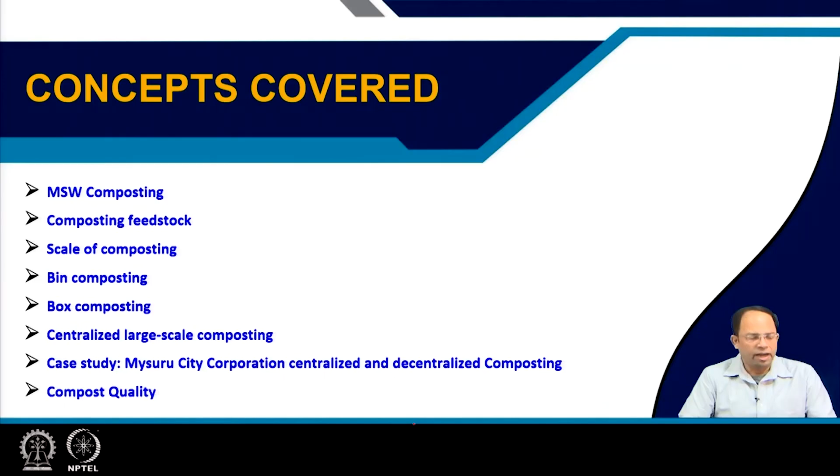Welcome back. In lecture 29, we will continue with composting. This is composting part 2. The different concepts that we will cover are municipal solid waste composting, composition of the feedstock or the incoming organic matter that comes for composting, scale of composting, bin composting, box composting, and centralized large scale composting. We will do a case study of Mysuru City Corporation, which uses both centralized as well as decentralized composting, and finally we will talk about compost quality.

Municipal solid waste composting started in India during the 1970s, and initially a lot of mechanical compost plants came up. We have earlier talked about mechanization, right, mechanical and manual operations. In mechanical compost plants, in the initial days this was set up. This had a lot of mechanical processes, and because there were a lot of machines and all, there were a lot of maintenance issues. Most of the equipment was also imported, so this had a lot of maintenance issues.

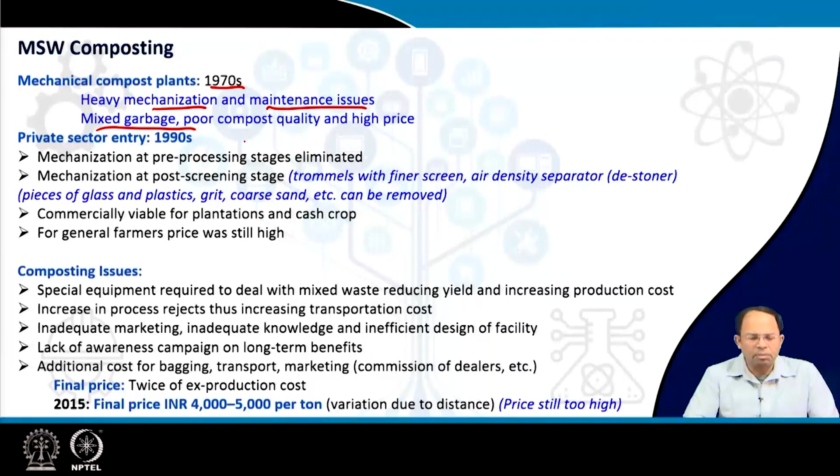Because the garbage was mixed garbage, there was no segregation at the beginning. That's why this kind of plants were introduced, but our garbage was so mixed, or the quality of the garbage was such, that the final resulting compost quality was pretty poor. And because of high mechanization, the prices were also very high for this kind of plants, and that actually resulted in failure of this kind of plants.

So the next generation of compost plants started coming during the 1990s, and usually the private sector started working on this particular sector. That means there were a lot of operations set up by private entities. Here the mechanization was removed at the pre-processing stages. That means initial sorting was done manually to a certain extent, but already the waste was segregated, though still some amount of manual sorting was required because not everybody segregates perfectly. Sometimes some areas of the city don't segregate and they give mixed sort of waste, right? So some amount of sorting is required.

But the mechanization of that particular process was eliminated, and mechanization was only adopted in the post-screening stage. That means once compost is produced and cured, mechanization was introduced so we can clean the final compost, using trommels with finer screens. In the pre-processing, trommels of larger screens are used, but in the post-processing, trommels of finer screens, or air density separators, which remove the stones, pieces of glass, plastic, grit, coarse sand, etc. can be removed from the final compost.

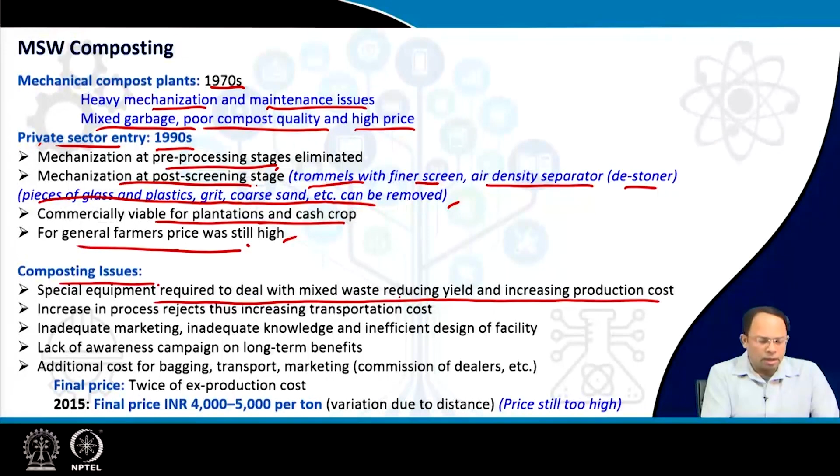Increase in process rejects thus increases transportation costs. If you deal with composting with mixed garbage, a lot of rejects will result, and that will increase transportation cost. This reject has to be transported to the landfill, so it is double transportation cost - you have to transport compost to the compost plant, then again transport it to the landfill site. Other issues include inadequate marketing, inadequate knowledge, and inefficient design of facility. That means each facility of composting has to be designed as per the character of the waste, as per the final product characteristics, and so on.

If you lack adequate knowledge in plant design, it will result in a wrong design. Similarly, inadequate marketing means I have to know where I can sell my product or what quality of product. So these are the things which are important. Lack of awareness campaign on long-term benefits is also an issue.

Repeated utilization of chemical fertilizers reduces the overall fertility or condition of the soil. So what are the benefits of composting? Composting improves the condition of the soil, and repeated application doesn't create problems. So this kind of awareness needs to be built up, and for that, campaigns need to be done.

Then there's additional cost for bagging, transport, and marketing of compost, because we have to give commission to the dealers and so on. Usually the final price is twice the production cost, and in 2015 the rate was around 4,000 to 5,000 rupees per ton.

Even though some ULBs do subsidize and sell it at much lower cost, if I really want to sell compost through a pan-India distribution network, for a large commercial composting plant this would probably be the price we have to sell it at. That's why the price is still quite high, and there's also variation due to distance—this 1,000 rupee variation is just for different distances to the final end consumer.

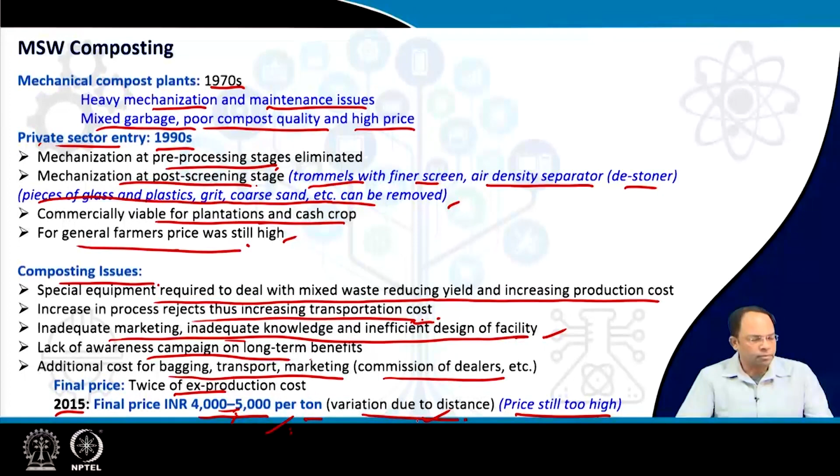Coming to composting feedstock, if it's segregated waste feedstock—that is mostly municipal wet waste or biodegradable waste, vegetable market waste, yard waste—then there is no problem. But if it is mixed waste feedstock, where the waste is mixed, then mandatory pre-sorting and segregation of the organic fraction has to be done for composting.

Street sweeping waste and drain cleaning waste are major sources of contaminants, and this has to be avoided. This is something we have to be careful about. If this gets mixed in, then the entire compost batch will also get contaminated, and we cannot use that as fertilizer.

Now coming to composting plant overall design, the first area is divided into multiple zones. The first area is the tipping area, which is usually a side-open large shed.

This is the area which receives the daily waste, and we have to plan it because composting takes a certain amount of time, so we have to store waste for a certain amount of time. All the everyday waste comes from the urban area, so we have to have storage capacity for holding waste for that much amount of time. The quantity has to be really thought of accordingly.

The area has to be planned, and unregulated storage is not allowed. That means we cannot store inconsistently—someday more, someday less, someday not at all. That kind of operation cannot happen. Everything needs to be planned earlier.

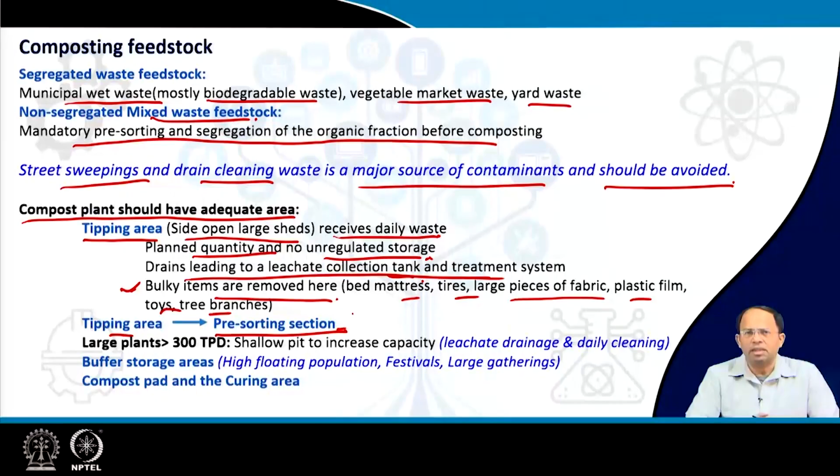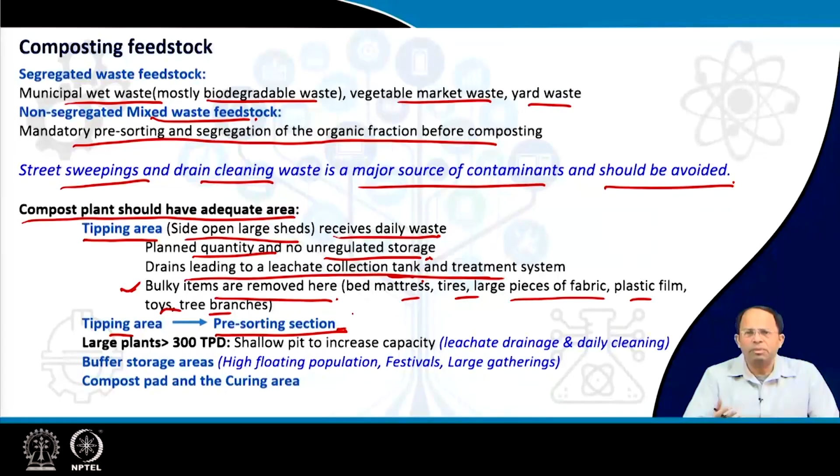This pre-sorting section is where we remove certain amounts of mixed, larger size material. Usually manual sorting is done—we remove some plastic, some plastic bags, or some amount of paper. We remove smaller things like that as well.

In case the tipping area does not serve as the pre-sorting area, the waste moves to the pre-sorting section. Sometimes, in case of large plants—for example, more than 300 tons per day—we can increase the size of this holding area by creating a shallow pit.

That means that because we create some extra volume below ground, there will be a lot of leachate that comes out. So leachate drainage and daily cleaning of that particular area is needed before we remove that waste to the next area. All this needs to be calculated.

And buffer, usually we have some buffer storage areas as well, for areas where there are a lot of events, festivals, floating population, and large gatherings. So we need to have some amount of buffer storage area as well in the plant.

Finally, from the pre-sorting section, the compost goes into the compost pad, where we create these piles of garbage which get composted. After the basic composting process is over, we leave the compost for curing, which also requires some area, usually 1/4 of the area required for the compost pad. So we have the compost pad and the curing area as well. These are the areas required for setting up a composting operation or composting plant.

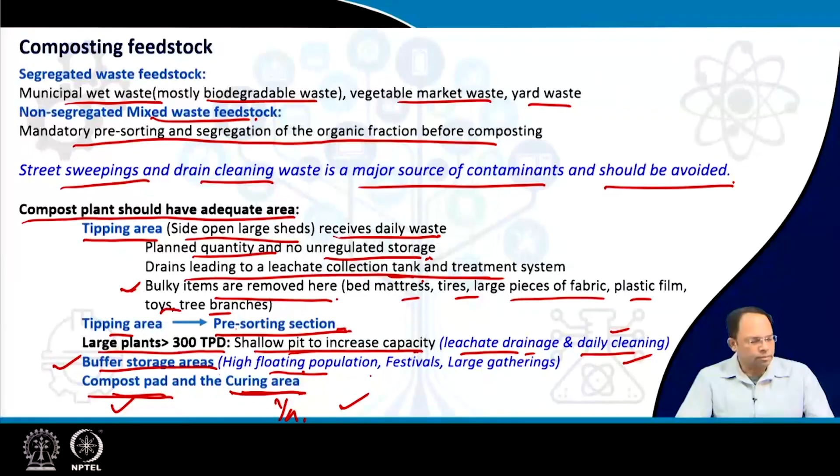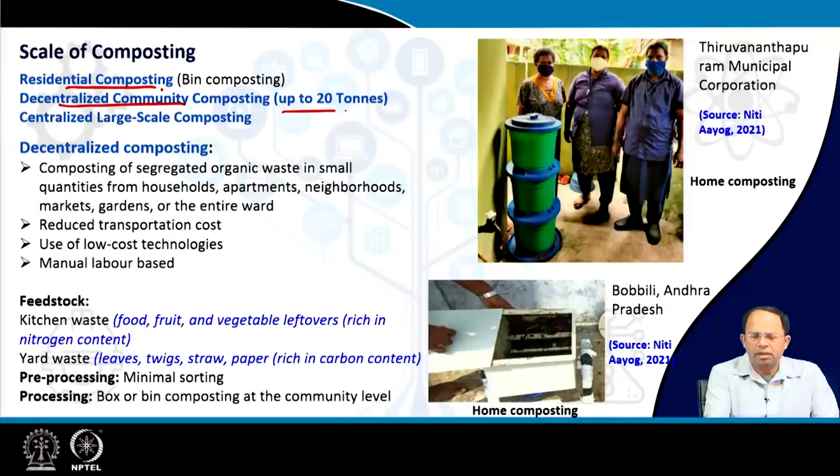Now, composting can be done at multiple scales. It could be residential composting, done at individual residences. It could be decentralized scale or done for the community, where we can go up to 20 tons. In some countries they may even go for 50 tons, but in Indian conditions around 20 tons is adequate. Then there could be centralized large scale composting, in case the volume exceeds this limit.

So coming to bin composting, as you can see in these images, this is in Bobbili, Andhra Pradesh. This is home composting done using this kind of container, provided by the ULB in case of Thiruvananthapuram Municipal Corporation. This is how home composting or residential composting is done.

Now, when I talk about decentralized composting, it is a larger scale than this kind of operation, and here we also use different kinds of technologies. So I'm going into that.

Decentralized composting refers to composting of segregated organic waste in small quantities from households, apartments, neighborhoods, markets, gardens, or even the entire ward. Why do we do decentralized composting? Because it reduces transportation cost, and we can use manual labor from informal waste collectors and rag pickers. Those people could be engaged at the community level, creating some jobs, and we can use low cost technologies without investing too much into the composting process.

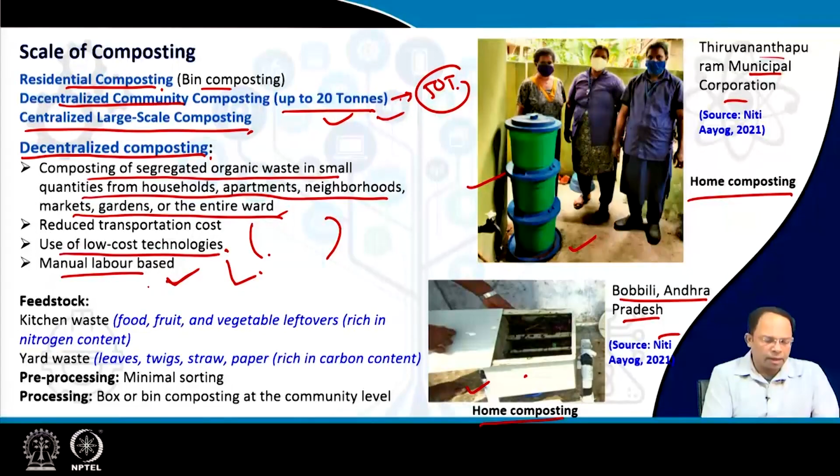The feedstock for this kind of decentralized composting is primarily kitchen waste, which is rich in nitrogen content, including fruits, food, vegetables, leftovers and so on. Yard waste also comes in, generated from gardens, which has leaves, twigs, straw, paper and so on - particularly dry or brown items, rich in carbon content. So kitchen waste is rich in nitrogen and yard waste is rich in carbon, and we have to mix them properly so we get good C:N ratios for composting.

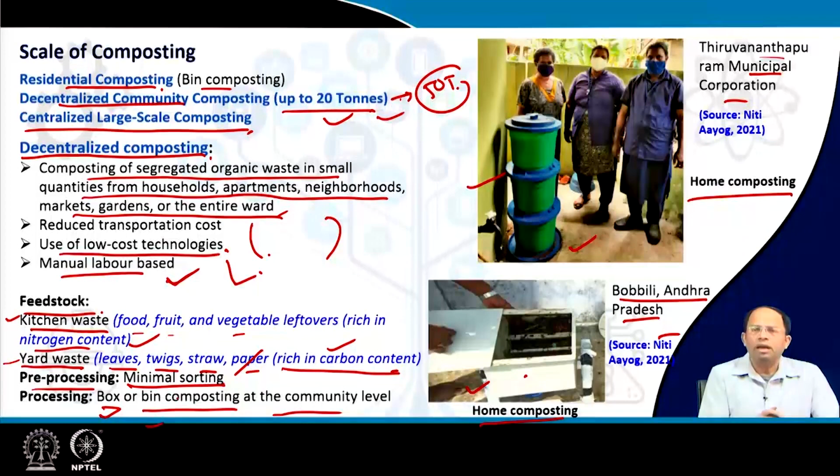Some amount of sorting is required, minimum sorting in the pre-processing stage, because even though we sort at the household level, some contaminants remain that need to be removed. Then processing is done via box or bin composting at the community level. We will learn about box composting and bin composting, two techniques that could be adopted at the community level.

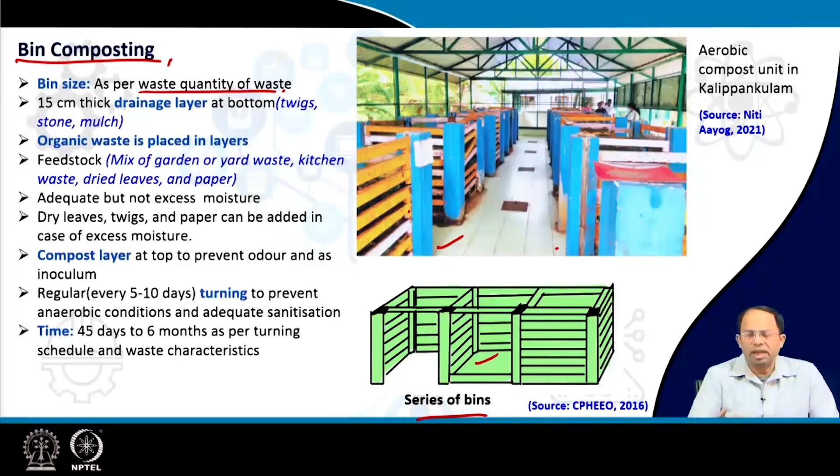There's a 15 centimeter thick drainage layer at the bottom, prepared using twigs, stones, and mulch. Mulch is made of organic matter like tree leaves and similar things, which is not composted but gradually decomposes to a certain extent. We call it mulch because it takes a long time to decompose.

We sometimes spread this in gardens. Instead of making compost, we just spread those leaves around and eventually they mix with the soil. This kind of material is usually laid at the bottom so it acts as a drainage layer which allows the leachate to pass through, and the leachate is collected.

Organic waste is placed above this in layers, and usually the feedstock is a mix of garden or yard waste, kitchen waste, dried leaves, and paper. Moisture is also provided, but it should be adequate, not excess, because excess moisture will lead to excess leachate production. If the moisture is too much, we can add dry leaves, twigs, and paper, which will reduce the moisture content.

Finally, at the top, we provide a compost layer, which not only provides insulation but also prevents odor and acts as an inoculum that starts the composting process. Every 5 to 10 days we turn it regularly to prevent anaerobic conditions and ensure adequate sanitization of the entire mass, so that heat is produced and the overall compost is sanitized.

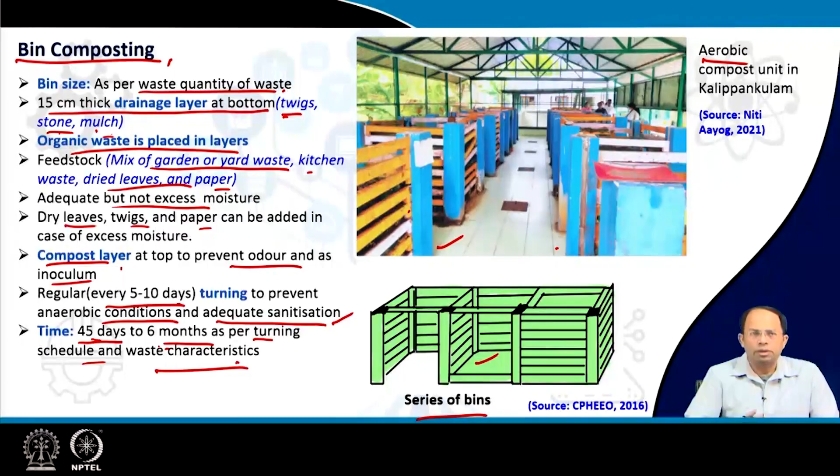Space requirement is less than standard windrow composting. We will learn about windrow composting in the next lecture, but it is basically where we pile the garbage in large heaps on a garbage pad or compost pad. Box composting requires less space than that.

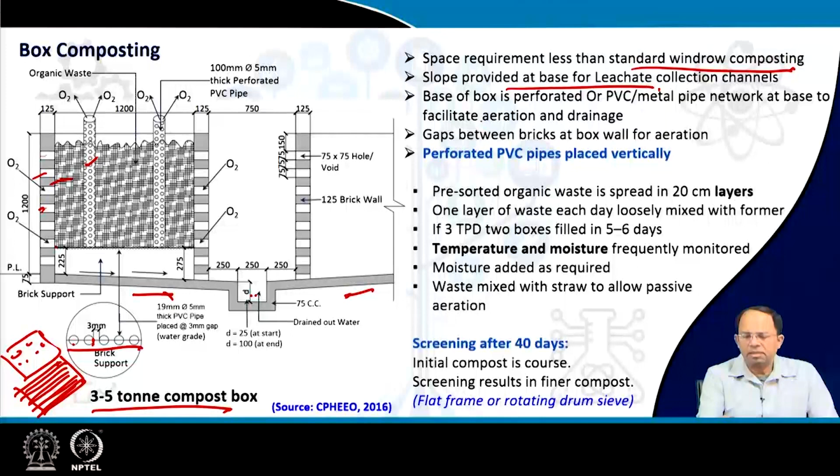A slope is provided at the base. The base is perforated or made with a PVC metal pipe network, which facilitates aeration and drainage. Perforated PVC pipes are also placed vertically. Pre-sorted organic waste is spread in 20 centimeter layers, one after another, and after each day new waste comes in and is laid out in layers, one above another.

Whenever one layer of waste is added, we loosely mix it with the former layer. We disturb the upper layer of waste and mix it so that the bacteria in the bottom layer will also move up to the upper layer as well.

Usually, if 3 tons of waste is generated per day, it takes about 5 to 6 days to fill two such boxes.

Temperature and moisture are frequently monitored in these boxes. If we find the compost is dry, we have to add moisture. Sometimes if the moisture is too much or the compost is compacted, to allow passive aeration we mix straw and other dry matter so there are gaps inside the compost and air can pass through.

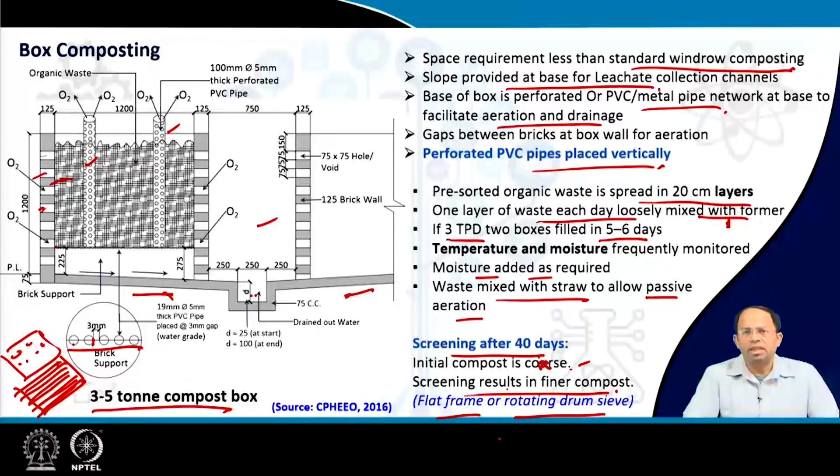Here you can see box composting happening in Keonjhar municipality. These are the boxes, and there are pipes for aeration, along with a conveyor belt for segregation of biodegradable waste.

Some mechanical segregation is done using conveyor belts, where the garbage is taken along the belt and some amount of segregation is performed.

This is a micro composting center, and the organic manure produced here is branded as Mo Khata and sold at rupees 20 per kilogram at outlets throughout the state. That is how this micro composting center operates at Keonjhar municipality.

In Vijayawada Municipal Corporation, around 198 tons of organic waste is processed for composting in 4 decentralized waste-to-compost plants. This is one of the plants you can see in the image.

Biodegradable waste comes here and is put inside a shredder, shredded into smaller particles. These particles are then put inside boxes where they are composted. This is box composting also happening in Vijayawada Municipal Corporation.

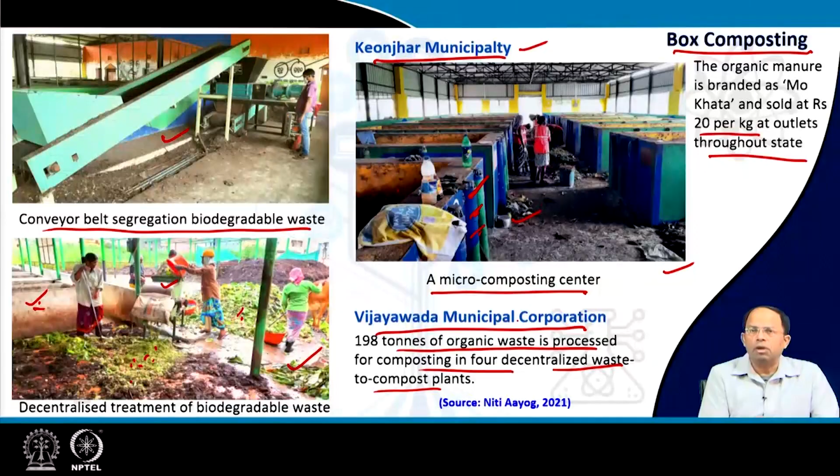Coming to centralized large scale composting, plant sizes can reach around 500 tons per day, meaning 500 tons of waste comes per day. So we have to do a proper analysis of the plant location, and the design of the plant has to be thought through properly.

Technical and environmental assessment of potential sites has to be done, similar to what we learned about site analysis for a landfill. We can similarly do analysis for a potential composting site as well.

Engineering and design professionals are used for the facility design, following particular procedures. We have to minimize traffic, odor, leachate and noise from composting operations, because it's a large plant. It has to be set up in an industrial area, not in normal residential areas, and all of this must be minimized.

A separate collection and pre-processing system can involve the informal sector for pre-sorting, and we have to recover non-compostable materials—some going to RDF and some as process rejects to the landfill site. There are also protocols for quality and composition of compostable materials, design of delivery routes for organic material, and a marketing strategy for the compost.

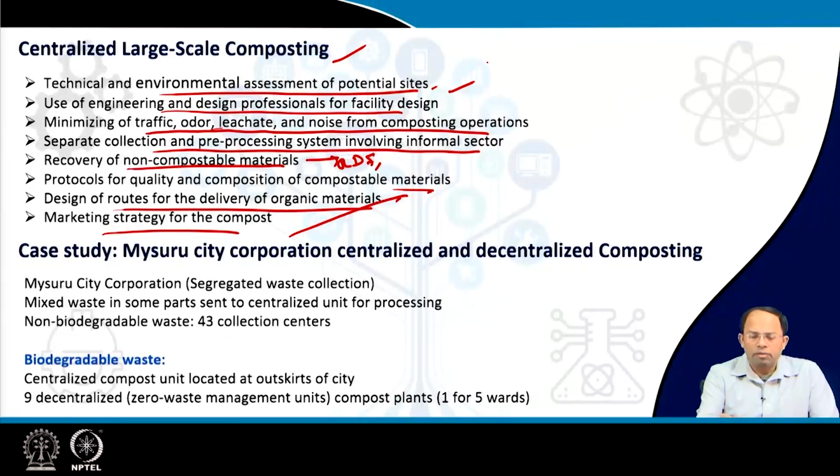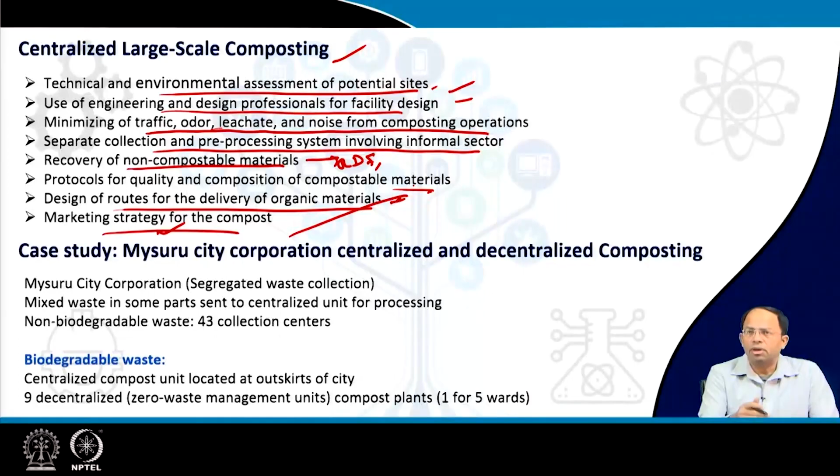So all this needs to be worked out for a centralized large scale plant. Why? Because this requires a lot of investment. So since a lot of money is involved, we have to do proper analysis for which locations are suitable, so that later on there are no protests. What should be the proper design so that the resulting compost is of proper quality. We have to also do marketing strategy for the compost, and design distribution routes so that overall the system is successful and there is no loss of demand after a certain amount of time.

So we do a case study of Mysuru City Corporation, which does both decentralized and centralized composting. Segregated waste is collected in Mysore and this is being composted. Mixed waste is also there in some parts, which is not sent to the decentralized plants but goes to the centralized unit. Non-biodegradable waste is collected in Mysore, which goes to 43 collection centers, where the waste gets segregated and recycling takes place.

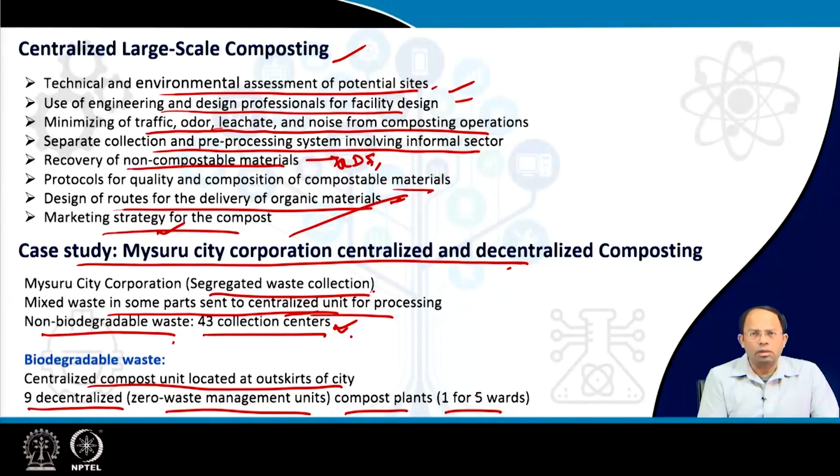But for wet waste, we have both a centralized plant as well as decentralized plants. The centralized compost unit is located outside the city, whereas 9 decentralized zero waste management units, or compost plants, are located inside the city, one for every 5 wards. So over here you can see a windrow at the centralized compost plant in Mysore. This is how the windrows have been created - the garbage has been stacked and left for a certain amount of period.

Then it is turned as well. How do we turn it and all this? We will learn that in the next lecture. But this kind of windrow system is utilized, where compost is done through piling waste in long rows, known as windrows, with aeration by turning periodically. So we turn the garbage after certain intervals.

Then once the garbage becomes compost, 2-stage screening is done. The final compost, because of the screening, becomes uniform in texture, and 50 kg bags are prepared and sold at ₹1,200 per ton - the cost is not that high. It is sold to nearby farmers, and this operation is done by a private company. Some of this compost is used by the horticulture department of the city for application in urban areas.

So the plant is located at Vidyaranyapuram, Mysuru, with a capacity of 200 tons per day. Vidyaranyapuram uses mechanized aerobic windrow composting - it's aerobic windrow composting, and the turning is done by mechanized processes. We will learn details later.

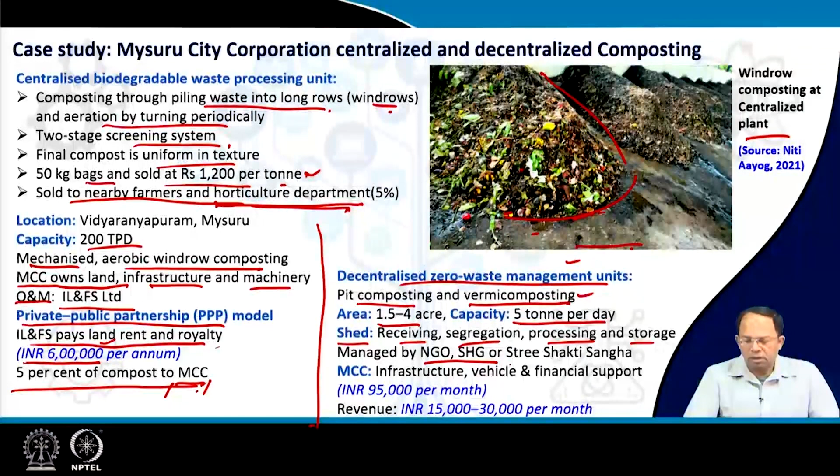So each of these decentralized units has a shed which receives, segregates, processes and stores the waste received. This is managed by NGOs, self-help groups, or Stree Shakti Sangha, where women are empowered to run this kind of operation. MCC provides infrastructure, vehicle and financial support, and they pay around 95,000 rupees per month.

Revenue coming out of this, which is kept for the self-help groups or the people who are working there, comes to around 15,000 to 30,000 rupees per month. So that is by selling the compost.

So this is what it looks like. Decentralized operation is actually not profitable, but because it's decentralized, we save on transportation cost, and this particular compost could be utilized locally. So there are a lot of environmental benefits as well. But in a centralized plant, there is of course profit by selling compost.

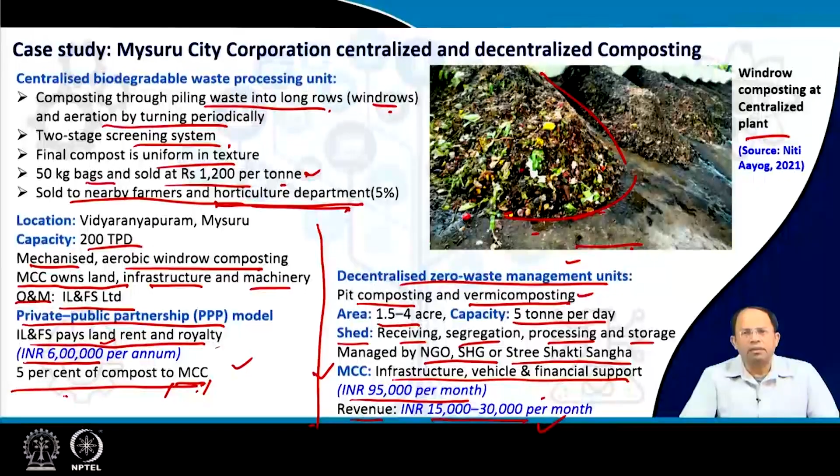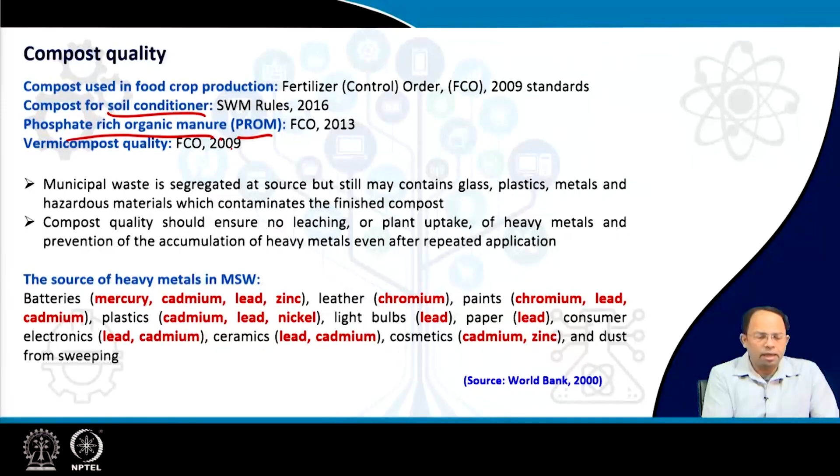Then coming to the final product quality or the compost quality, and because compost is used in food crop production, it could be used as a soil conditioner. Some special compost could be produced like phosphate-rich organic manure, PROM, which we discussed earlier. Then vermicompost is also there, which is compost via earthworms.

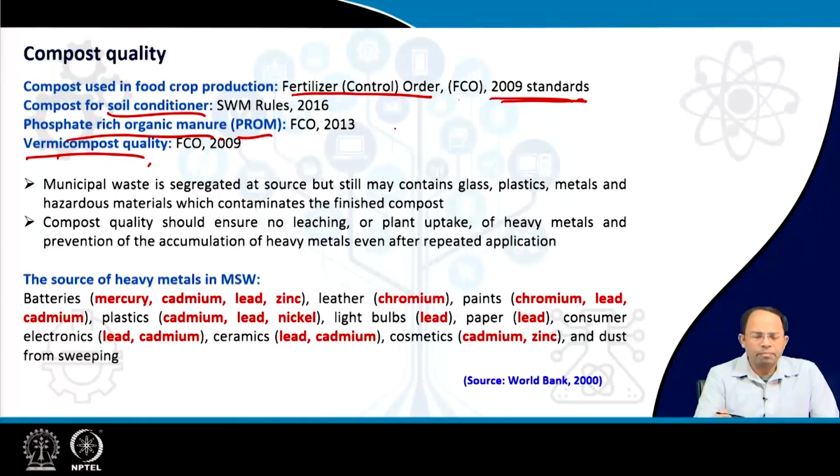Each of them has got certain standards, and the standards are usually prepared by the Fertilizer Control Order, FCO, which is by the fertilizer departments of the government. In 2009 they gave these standards for organic fertilizer. Similarly, Solid Waste Management Rules 2016 has also given us certain standards for compost, which could be used as soil conditioners in urban areas. Then PROM has got certain standards, and similarly vermicomposting has also got some other standards.

Now, what are the standards and all? I will come to that.

Municipal solid waste is segregated at source, but still contains glass, plastic, metals and hazardous materials, which contaminate the finished product. This we have learnt earlier. So we have to make sure that the final compost is of proper quality and these kinds of contaminants are not there. That's why we have created these kinds of standards, so that we can check against those standards whether the compost is of adequate quality or not.

Then compost quality should ensure no leaching or plant uptake of heavy metals and prevention of accumulation of heavy metals even after repeated application. So what does that mean? That means compost should not have heavy metals, or it should have heavy metals as per the standards.

The heavy metal standard value should be such that even after leaching or uptake of nutrients by the compost, and even after repeated application of the compost yearly, over a period of years the total concentration of heavy metals will gradually increase, but overall we should not have a concentration of heavy metals which would be harmful for human health. So the initial standards have to be set considering all this, and that is why we have to be very careful while setting standards for compost.

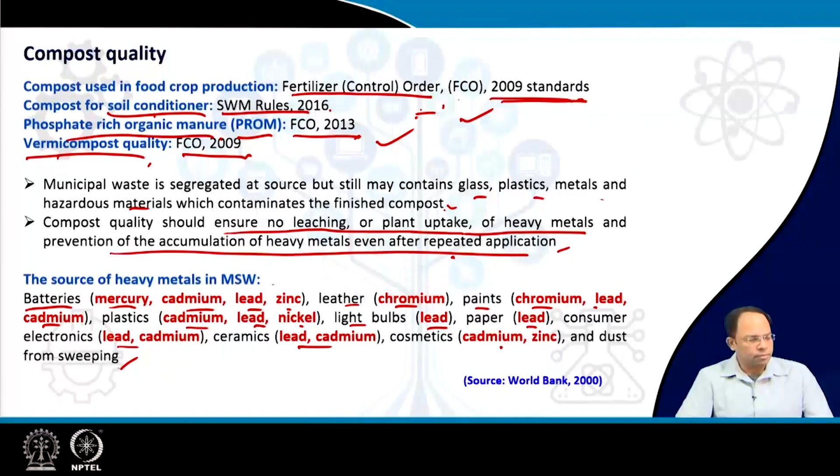So we have got heavy metal standards. These standards also need to be re-evaluated after certain time periods, meaning after maybe 5 or 10 years the standards need to be revised as per the health concerns of that particular community or society. So standards can be improved upon. Earlier the standards were poor, but the more we progress, the standards are set higher and higher so that the final product is better and better.

Then we have got pathogen standards, that is, what sort of pathogens are allowed at the end. That means composting is a process where there are microorganisms and then there are pathogens.

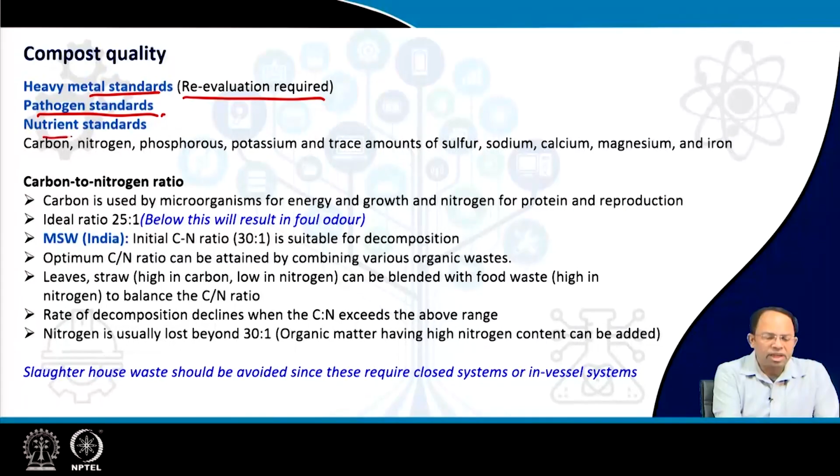So at the end there should not be any pathogens left in the compost, right? Then nutrient standards: what should be the contents of the micro and macronutrients so that it is beneficial as a fertilizer. So those standards also have to be maintained.

So carbon, nitrogen, phosphorus, potassium, and trace amounts of sulfur, sodium, calcium, magnesium and iron - these are the different nutrients we are talking about. So these three sets of standards have to be there. That means it may be one set of standards for the compost, but actually we have to look into these three groups of items that should be considered while we set a compost standard.

Now compost should also have a desired carbon to nitrogen ratio. Usually this value is 25:1 for carbon to nitrogen, and carbon is used by microorganisms for energy and growth, so there has to be adequate carbon in the organic waste, otherwise the process will not happen properly. And nitrogen is required as protein and for reproduction, because you need to create more microorganisms, so nitrogen is required for reproduction of the microorganisms.

So the ideal ratio is 25:1, but if it is lesser than that, it will result in foul odor. That means carbon value is less, and this somehow results in more odor, and the process takes a longer time, and also some anaerobic process starts happening. So in India, we usually find the CN ratio is around 30:1, which is suitable for decomposition. So the ideal is 25:1, but even 30:1 is fine.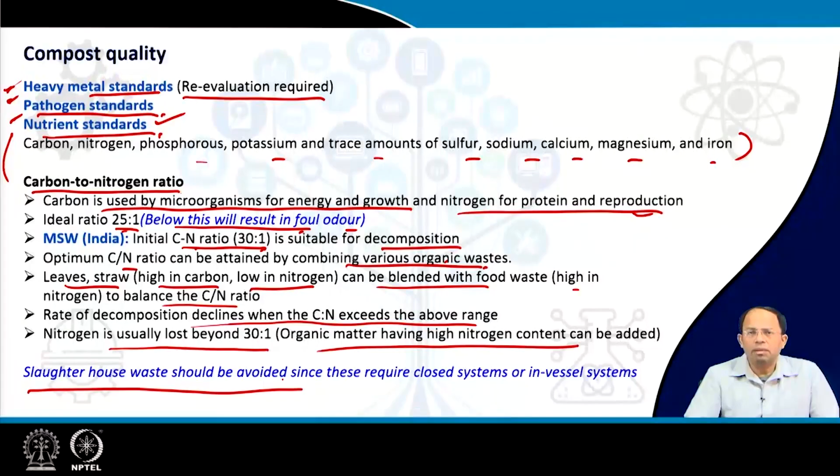Rate of decomposition declines when the CN ratio is above the ranges, and nitrogen is usually lost beyond 30:1, so organic matter having high nitrogen content could be added in that particular case. Now sometimes slaughterhouse waste is also added in the composting, but in that case we require special composting systems, such as closed systems or in-vessel composting systems, to actually deal with slaughterhouse waste.

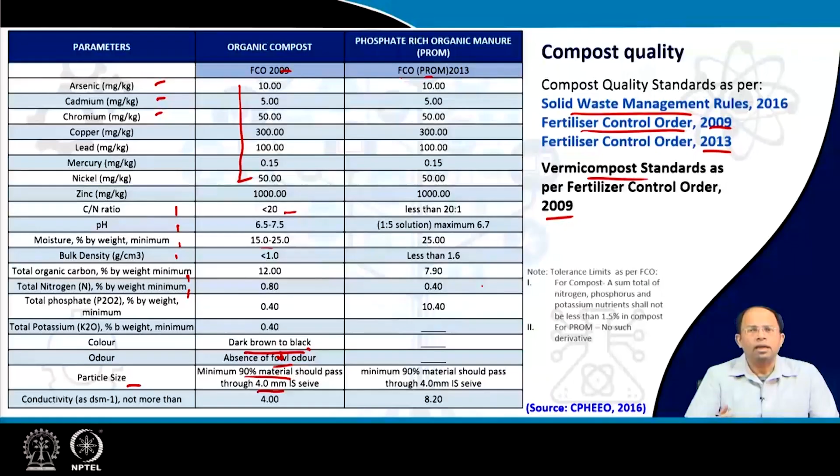So these are some of the references you can use.

And to conclude, composting is practiced at different scales: residential scale, decentralized community scale, or centralized urban scale. Non-compliance of compost quality standards makes the entire process unfeasible. So we should be careful that when we design our processes in centralized or decentralized plants, we have to make sure the final compost quality is as per the quality standards set. Thank you.